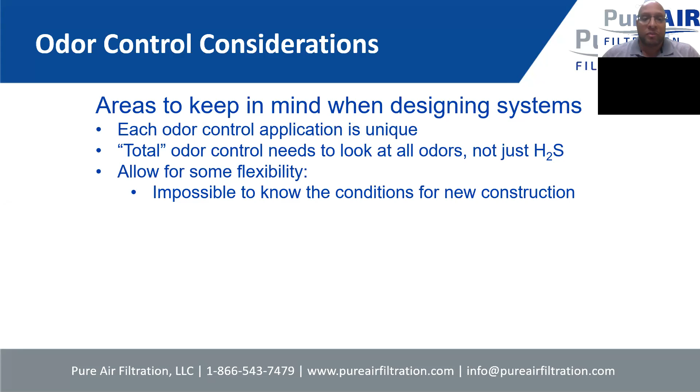Also, it's important to have some flexibility, because especially for new projects, you may not have all the information up front. Having that flexibility will allow us to customize that system, so that way we can make sure even in the future we have that flexibility to change up the unit if necessary.

So types of sewage odors - again, hydrogen sulfide is our primary focus today, and I would say the most common gas that is required to remove. But you also have the mercaptans, some reduced sulfur compounds such as dimethyl disulfide, dimethyl sulfide, and carbonyl sulfide, as well as ammonia, amines, and some VOCs. So it's important to know that process, and get a better feel for what other odors may be present.

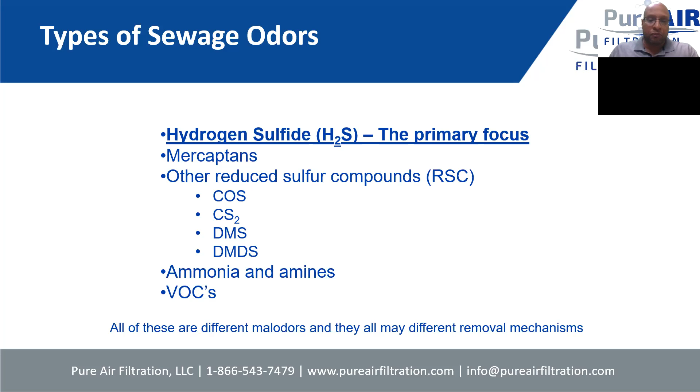Here's an odor threshold, odor detection chart to give you an idea of the different odors and what that smell correlates to. Hydrogen sulfide, rotten eggs, which most are common with. Mercaptans have more of a rotten vegetable, cabbage, or garlic smell. And some of the dimethyl sulfides and carbonyl sulfides have different odors as well.

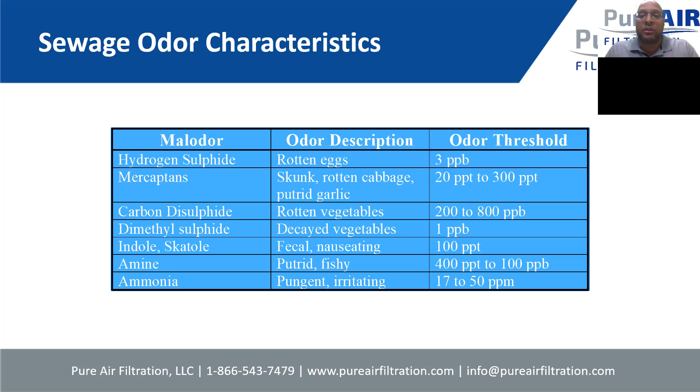It's important to know that the odor thresholds, for example for hydrogen sulfide, is very low, so at 3 ppb it's very easily detected. So even if your H2S levels are very low, you can still have customer complaints in the surrounding area. That's why it's important to have some type of system in place that gives you 99.5% H2S removal, or even 99.9%, so you really get it below that odor threshold.

So the technologies for the different H2S levels - this is important for us. It gives us the ability to design a system properly, looking at a few different variables, whether we want to make the system as cost effective as possible, but also make sure the unit's going to last, or the media has a long life, at least 1 year minimum. Because no customer would really be interested in changing out media frequently.

So on this slide, we talked about different odor levels. For example, if you have very low or intermittent H2S levels, standard adsorbents would work pretty well, as far as plain carbon, as long as you design that system with a few accessories I'll talk about later, to provide that necessary odor control. In some cases we can even use our side access housings for these systems, and they're very advantageous because you can reduce that footprint while still providing a system that gives you high efficiency.

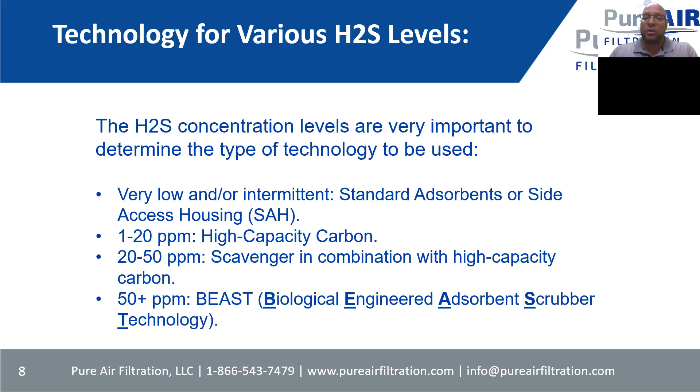So this is the odor control system selection chart. This chart was used in a previous webinar, but I thought it was very helpful as far as what systems you would use based on the airflow as well as the H2S levels. If you have very low airflow and very low H2S levels, in some cases you can use different engineered adsorbents, activated or plain activated carbons. As that airflow increases and the H2S levels increase, you're fixed into what type of system will be best to use.

I also wanted to mention that even at 50 ppm H2S levels, typically we would go with some type of biological system. Actually, in some cases, if the airflow is low enough, it may make sense to use an engineered adsorbent. So that's something we keep in mind as we're moving forward looking at the entire design to see what makes sense. Again, as I mentioned previously, all these system units are for the most part custom - each application has its own identity.

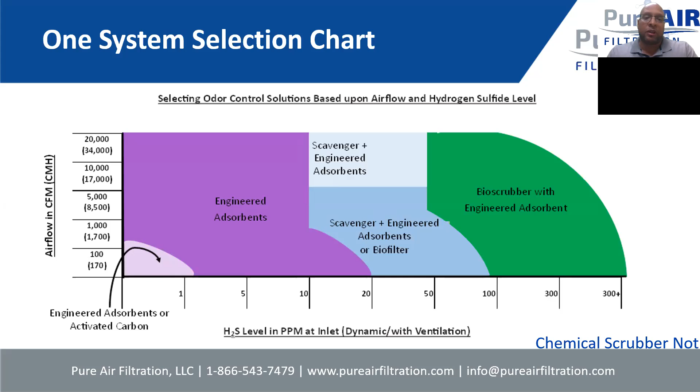So you look at all different solutions to a new project.

As I mentioned, for very low intermittent H2S levels, it may make sense to use a side access housing. The benefit of a side access housing—this particular unit shown here is painted steel—is that you can provide higher velocities through the media itself. I'll talk about velocities a little later, but that allows a smaller footprint for the system, which helps with cost as well as installation.

So it's only recommended for very low H2S levels. Otherwise, you'll be replacing the media quite frequently. But if the levels are low, it definitely is a great option.

These units are now manufactured out of fiberglass, so that gives it the highest corrosion resistance. We have a few systems installed in various locations out of fiberglass.

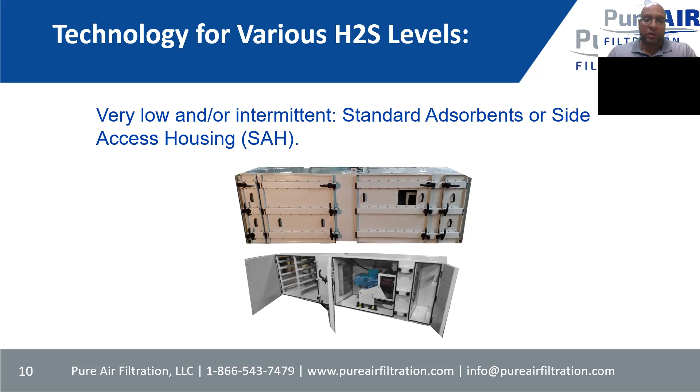Those side access systems are equipped with modules—basically plastic, disposable modules filled with different adsorbent medias to remove the different odorous gases. Typically for wastewater applications, we would use our PP12 module, which holds more of the adsorbent media.

We'll slide those modules into the system, turn the unit on, and it will connect up to the existing duct and neutralize the air. As I mentioned, it's a very effective system for lower H2S levels, and it really reduces the footprint to make the system more cost effective.

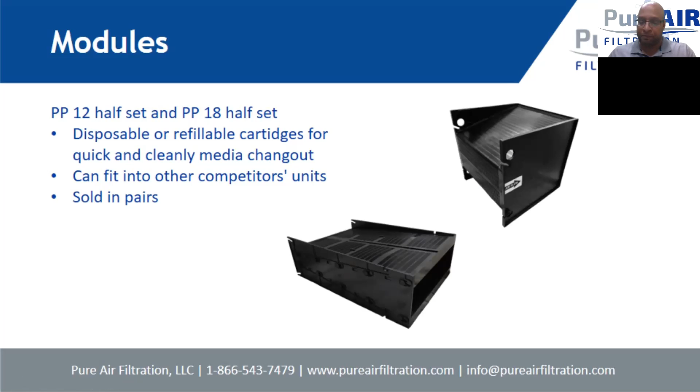For H2S levels in the 1 to 20 ppm range, you would use a high capacity carbon or engineered carbon—for example, our Sulfazorb XL media.

I didn't show a unit for this particular slide because that media, our Sulfazorb XL, can really fit into any one of our units. It really just depends on the airflow that's required, as well as the H2S levels, and from there we size the system. So that's the high capacity carbon we'd use for the 1 to 20 ppm range.

For 20 to 50 ppm, we would of course use our Sulfazorb XL as a high capacity carbon, but we would also use the scavenger I mentioned previously, our Sulfazorb FE. That acts as, I call it, a punching bag for the H2S—it takes the heavy blow, and then the Sulfazorb XL will polish the remaining H2S.

Again, this media can be loaded into any one of our systems—whether deep bed systems, or typically the deep bed media can be placed in side access housings, though in most cases that wouldn't be necessary.

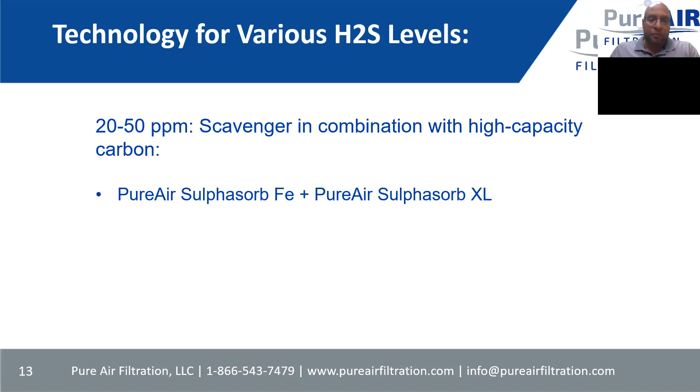And again, at 50 ppm or above, you're looking at biological technology, which won't be discussed in this webinar but will be covered in next month's webinar. But again, depending on the airflow, we may not rule out an engineered adsorbent system even with higher ppms—it's a case-by-case evaluation.

Types of adsorbents: activated carbon is just plain carbon, whether coconut shell, coal-based, or in some cases wood-based. It's good for general odor capture, especially VOCs. It's been around for quite a while and is very effective that way. It's not really designed for H2S, so it doesn't have much capacity for H2S removal, and there's also no way to measure the remaining life of the carbon itself.

Engineered adsorbents use chemisorption principles—whether it's an activated carbon impregnated with or combined with a catalyst. That lets you focus on particular gases with that media itself, and the media life can be measured by measuring the remaining amount of that catalyst. Scavengers are a low cost media, like a roughing media, for H2S.

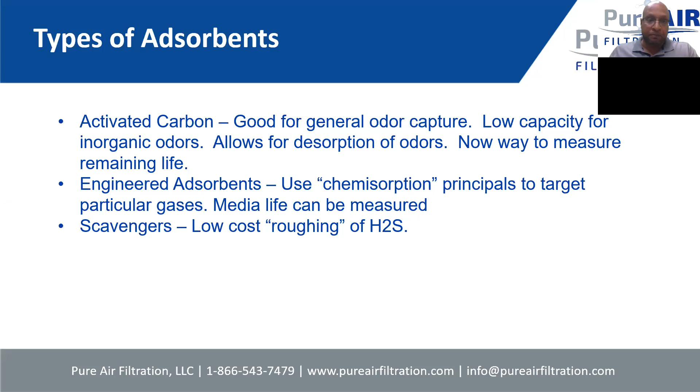So how does gas phase adsorption work? We've touched on this in previous webinars, so I won't dig too deep into it, but I'll explain a little: the different medias used for odor removal are very porous, and that's what captures the gaseous molecules and holds them in place.

For plain carbon, as those molecules come in, they're held in place by the media itself inside the media. Now the problem with plain carbon is that as larger molecules come through, they can dislodge the molecules already in there—this is called desorbing or off-gassing. So there's that potential for off-gassing in some plain carbons.

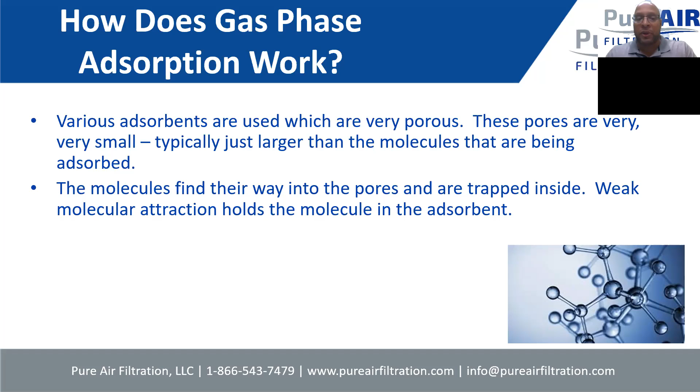With chemisorbent medias, since they have that catalyst inside, once those gases come in they react with the media and the catalyst, so it keeps them inside and there's no way for it to desorb. Once that media is used up, since that's a permanent reaction, you have to dispose of the media and replace it.

This slide touches on adsorption and chemisorption. I won't spend too much time here, as this has been covered in previous webinars, but the best analogy for the different medias would be to view them as a sponge. Just as a sponge soaks up water and holds it in place, adsorbent medias work similarly, where gases are essentially sucked into the media itself. Depending on whether you have some type of catalyst will determine whether it's chemisorption or adsorption, but it's still a form of adsorption.

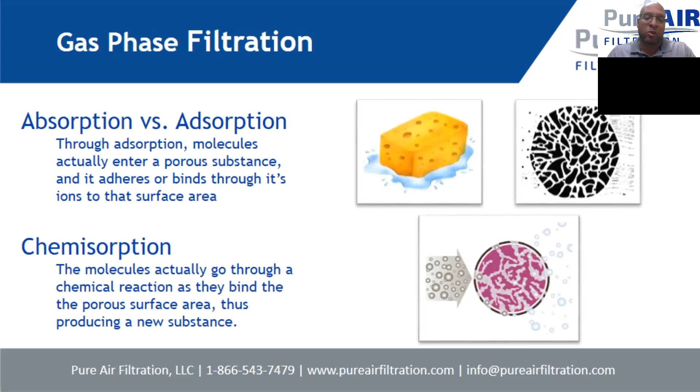Here's a microscopic view of activated carbon, just to show how porous it is. Those molecules are trapped inside of those pores.

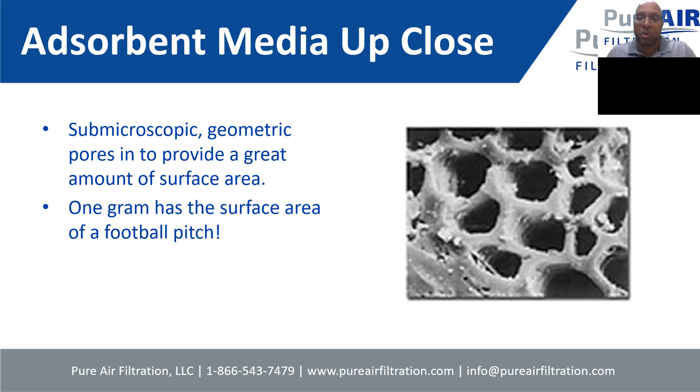So types of filtration media: you have a physical process, adsorption, as I mentioned, with activated carbon as an example, where it holds the media in place. That process is reversible. So if you've heard of regenerating carbon, whether via heat or water, in essence you're just washing out or burning out the gases that were trapped inside.

And then you can reuse that carbon. The chemical process, or chemisorption, examples are permanganate-based medias, or medias impregnated with a permanganate, also impregnated carbons. That process is irreversible. So once the gas reacts with that particular catalyst, it turns the entire media itself into a solid byproduct.

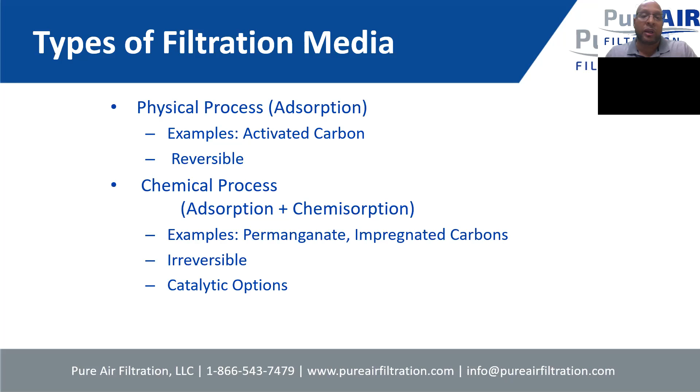So what is activated carbon? In essence, it's just charcoal that's been activated, typically with steam, to open up the pores, to ensure that the carbon will hold on to the different molecules. It's great for removing VOCs, but not a great capacity for H2S, and you can have off-gassing as I mentioned previously. There's really no reliable method to check and see when it's used up.

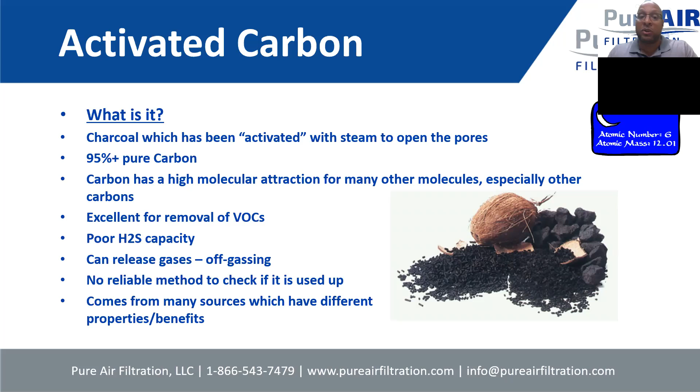In essence, it's more of—I wouldn't say it's a guessing game, but you're waiting for a breakthrough to determine when it's time to change the media, which is not ideal.

So carbon regeneration, as I mentioned previously, there are two different types of regeneration: whether you're using a kiln to burn away the different adsorbed gases, and then you take that regenerated or reactivated carbon and reuse it in the system. But each time the carbon is reactivated, you're losing that effectiveness, so over time you have no benefit from the carbon.

There's also water regeneration, in situ, where the entire vessel is filled up with water to rinse out the different gases, say for example H2S, and it washes that out and basically turns into sulfuric acid. The problem with water regeneration is that it doesn't wash out the other odors that are going to be present in this application.

So you're going to lose that effectiveness and efficiency for the media, and once you regenerate the system, you have to wait for the unit to dry before you can activate it. There's quite a bit of downtime when using water regeneration, and generally we're just seeing that technology phased out. The majority of engineers and consultants we work with aren't using this technology at all.

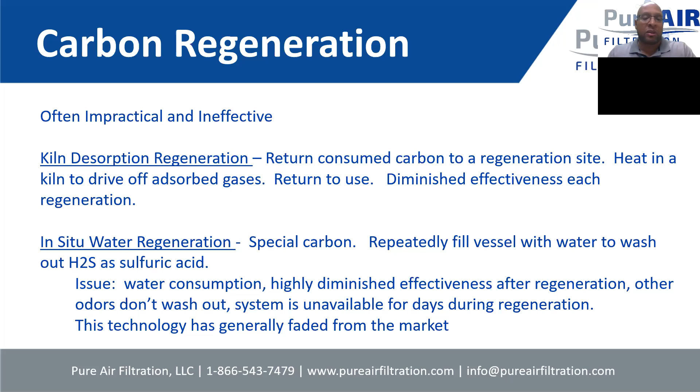So chemisorption, as I mentioned previously, is when you have a media impregnated with some type of catalyst, for example potassium permanganate, which will oxidize most odors. In essence, you're just converting that gas into some type of inert solid that can be landfill disposed, and it's non-toxic or non-hazardous.

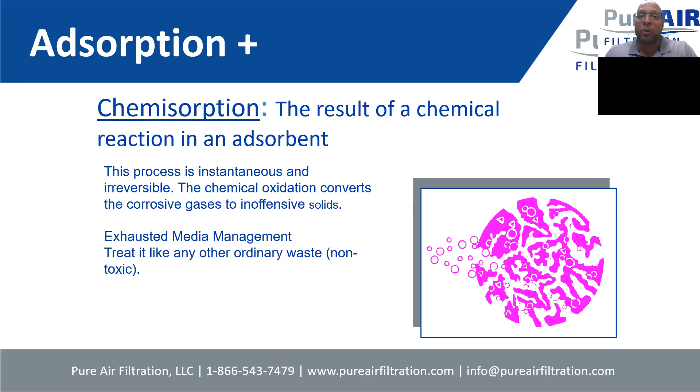So, different engineered adsorbent medias—really, depending on what gases are present will determine what media we use to ensure we get total odor removal. As I mentioned in this presentation, we are discussing H2S, so that'd be our Sulphasorb XL. But again, as it's very common, there are always other odors present.

So when the systems are designed, we ensure that we have the ability to provide some type of, as we call them, polishing medias, to ensure we're going to take out all the odors. I'll discuss a little bit later our thought process when designing these systems, to make sure we provide a unit that's going to take out H2S for the length of the desired media life by the end user, as well as ensure we take out those other odors.

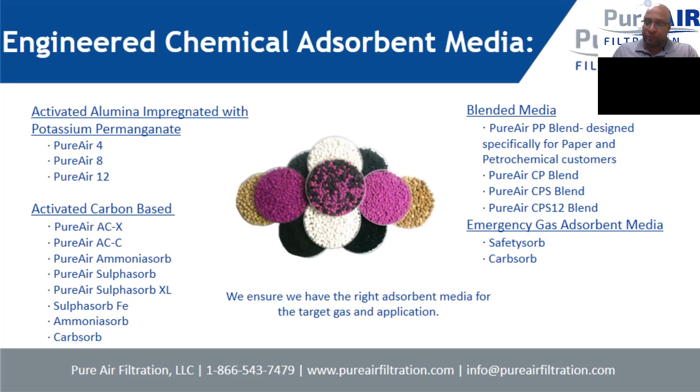Some of the substrates of the engineered adsorbents used, whether it's activated carbon, may be impregnated with some type of acid to remove different gases. Aluminas are very popular, as well as some zeolites and clays. The clays are more of the scavengers used as H2S roughing media. Some of the different impregnates include caustics, acids, oxidizers, and different catalysts.

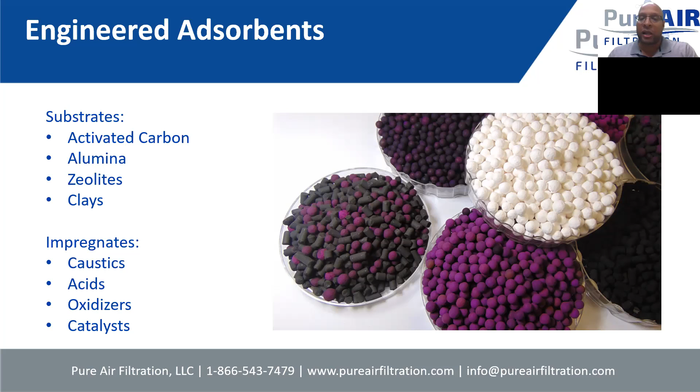This slide is really a representation of our Sulphasorb XL. It's a carbon-based media, but I'm going to say impregnated - they take a carbon powder and add a catalyst to it, which is typically magnesium oxide, I believe, and then extrude that into a pellet. So this media is really great for H2S removal.

It's in essence like an H2S sponge, looking to remove the different H2S. Depending on what substrate was used for the carbon, it may have some capacity for VOC removal, but typically it's designed for H2S. It has 66% by weight of H2S removal, so now we can really reduce the size of the system and still provide great efficiency.

As the H2S comes in, in essence there's a chemical reaction where it separates the water, and then you have a sulfur byproduct. This media is landfill friendly and can be disposed of - we just recommend you follow any local codes when disposing.

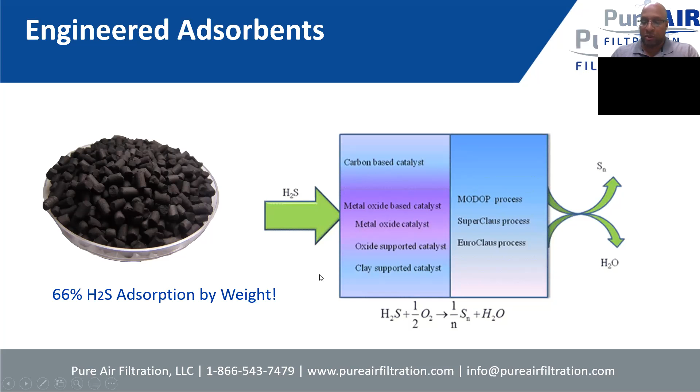Permanganate impregnated medias - again, that's typically activated alumina, a very porous substrate, impregnated with KMnO4. We can provide different concentration levels of the KMnO4 depending on the application, typically 8% or 12%, to give us that added odor removal.

How it works is that the permanganate is going to oxidize the different gases as they pass through the pellet. In that way, we neutralize a lot of the organic odors.

The media is non-combustible, so the alumina won't catch on fire or burn, which is very important, mainly in toxic scrubbers, where you're dealing with very high levels of a toxic gas and have that volatile reaction. So it's important to have some type of media that won't combust.

You also have an added benefit of a permanganate-based media in that it changes colors. As the media is being used up, it starts off a very bright purple, then goes to more of a brown color, and it's actually white when it's used up. That helps give the ability to know if the media is used up or not.

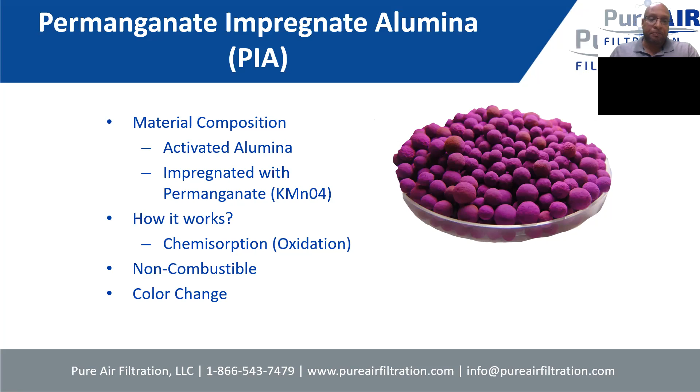This is a blended media that's our PureAir Filtration go-to polishing media, because we're blending a plain carbon and a permanganate-based media. So now we have nice broad spectrum odor removal, and we place that media as the last layer in any of our odor control systems.

That way we'll start off with the media to remove H2S, and then after we remove the H2S, we'll go into the second chamber with this polishing media to remove all the other odors. Just a little secret with PureAir Filtration - usually if we get requests, different projects will come up and we're given the airflow and H2S levels.

We'll always design a system to make sure we have the unit, the media will last a certain amount of time, whether it's a year or two years, but we're always going to design a unit to make sure we can accommodate a polishing media. That way we can remove those odors, or at least have that ability to provide this media in the future. I think that's very important to vividly remember.

There was a project where we worked on, they wanted to remove H2S and we designed a system for that, and it was no problem. But come to realize there was no H2S in the process - it was other odors, and they had a neighbor pretty close that was still complaining about odors. So in the engineer's and end user's mind, well, this system doesn't work. But actually the system was designed to remove H2S, and it would do that, but there were other gases. We were able to provide a different solution since the unit was designed to accommodate a polishing media, which worked out well.

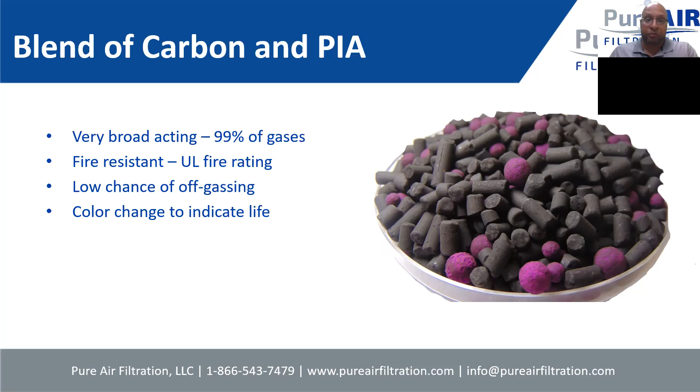In the Scavenger, again, it's our Sulphasorb Fe. It's basically a clay-based substrate with iron oxide, so it's going to be very efficient at removing high levels of H2S.

Again, as mentioned, more of a roughing filter, roughing media. So if you have high levels of H2S, we can knock that down to about 90% or so, and then from there, make it a little more manageable to remove the remaining amount using a high capacity carbon and also the polishing media.

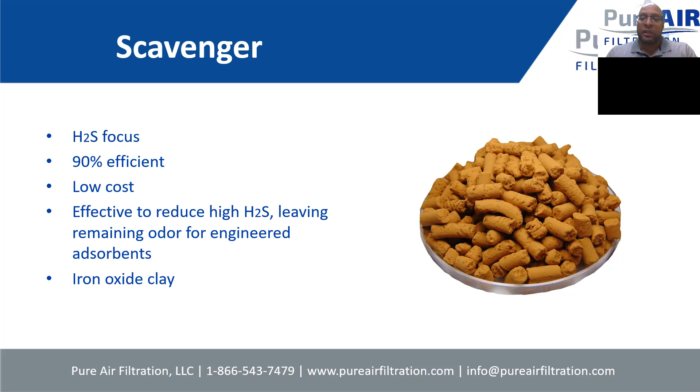The benefits of the Scavenger: even at very high levels, you may have to replace the media a little more frequently than a high capacity, but it's very low cost. So it takes the sting out of replacing that media because of the lower price point for this particular media.

So different materials in construction for odor control vessels and systems, with fiberglass being the most popular and most recommended, at least by us, as far as any wastewater application. It has the highest corrosion resistance, and you have a lot of flexibility as far as different configurations with different molds, and we can configure it and customize it to fit in most footprints and spaces.

High density polyethylene, in some cases very popular, starting to gain more traction as far as the material of construction. You have a little more improved cost than fiberglass, and also improved long-term UV protection. In some cases it may just be the consultant's preference whether they want fiberglass or the HDPE. Either material of construction is acceptable to PureAir, so we have that flexibility that way.

316 stainless steel is very common as far as the metal itself in wastewater applications. In regards to odor control systems, it's definitely effective, but it's very important to make sure that the system's designed properly. You need to have some type of mist filter on the inlet of the system itself, because you don't want wet, moisture-laden air combining with the hydrogen sulfide, creating sulfuric acid in the system. Over time, it could start to corrode even 316 stainless steel.

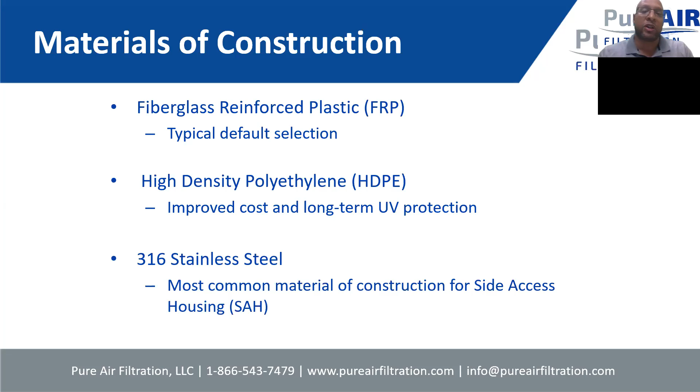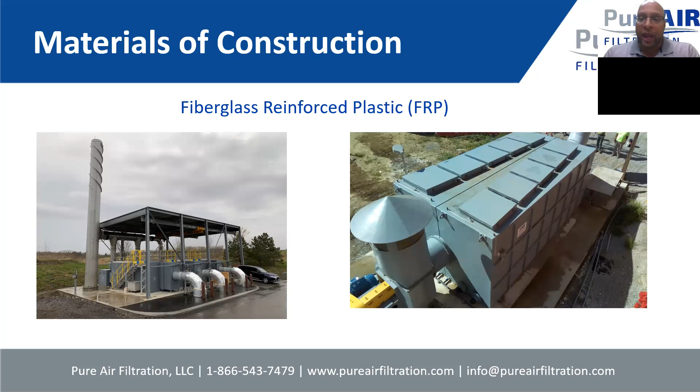So some different materials of construction again: fiberglass, shown here in these horizontal systems, gives you an idea of the flexibility of molding that fiberglass to fit in very tight spaces. So very popular in regards to lower profile systems, and you still have that excellent corrosion resistance.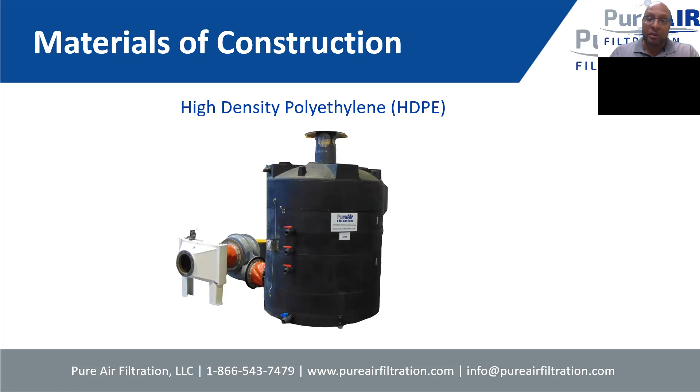And also 316 stainless steel - as I mentioned, for these configurations of systems, the horizontal ones I'll discuss a bit later, 316 stainless steel was very popular, as you can bring in different sheets of metal and then weld them together. Now, fiberglass will be the material of construction of choice in almost all applications, as our recommendation, but depending on the odor level, 316 stainless steel is an option.

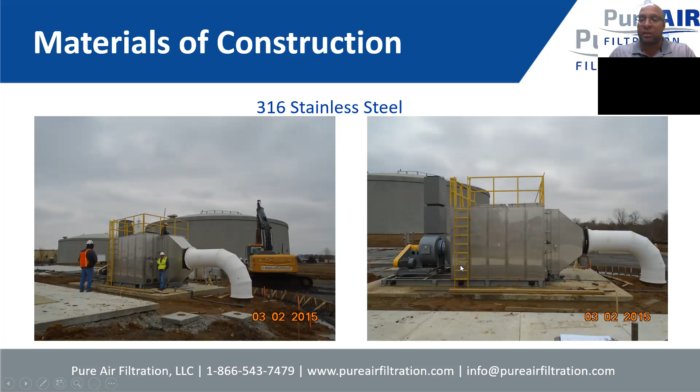All right, so different configurations: vertical flow versus horizontal flow, upflow versus downflow, and then blow through versus draw through. Vertical flow systems are very common, very popular, really for different applications - it really depends on the space. Any footprint or space restrictions will determine which configuration may work best for the consultants or end users.

Very simple construction for really all of the adsorbent systems. We have the inlet mist and grease filter, very important - we want to keep that adsorbent media dry, because you don't want any water molecules or droplets, or any grease, blocking up the pores, which will limit the effectiveness of the system. Then we have the blower and the vessel, then the adsorbent media.

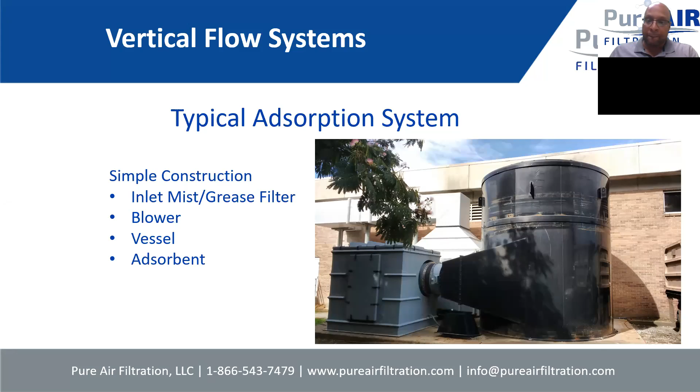Horizontal flow systems, really the same design. You have the blower, vessel, the media, mist and grease filters, but now all the components are in a more streamlined unit, connected as one complete assembly that can be dropped into place, ducted in, and then powered and run.

From our experience, our recommendation typically would be for horizontal flow systems. As I mentioned at the beginning of the webinar, with PureAir filtration, we ship systems all over the world, so it is much easier to ship the horizontal units, as they are designed to fit in ocean containers. It makes for a very compact, low profile system that can be used worldwide.

It also gives flexibility as far as the different media, with separate media chambers used to provide different adsorbent media depending on the different gases. As I mentioned, we design systems to remove, say, H2S, but we want to account for other odors that are more likely to be present. Having those independent chambers allows us that flexibility in the future.

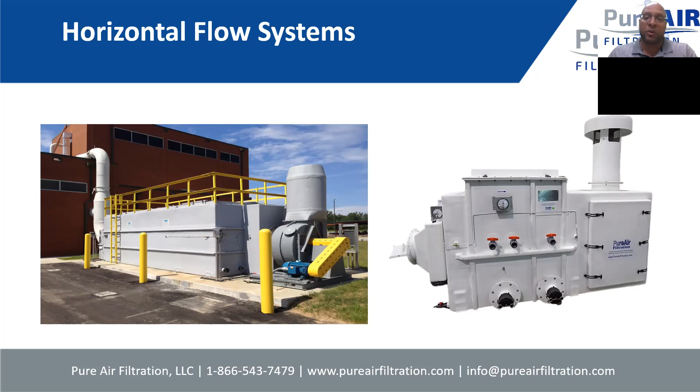So upflow versus downflow - this is really in reference to vertical systems. Typically, I would say 99% of the time, odor control units will be an upflow design. You have the blower itself blowing into the bottom of, say, using the drum as an example in the photo on the left side. As the odorous air comes in through the blower and blows into the bottom of the drum, that odorous air moves its way through the adsorbent media and is then discharged out through the stack. It's the most common design for odor control.

The downflow design is typically seen in toxic gas scrubbers. It allows you to remove only the portion of media that's used up - you can skim off the top of that media and replace only that. With an upflow design, it's very important to have a mist and grease filter, which ensures that no grease gets into the bottom of the unit and plugs up the perforated screen. As long as a mist and grease filter is in place, the upflow design for these vertical systems is probably the best design to go with.

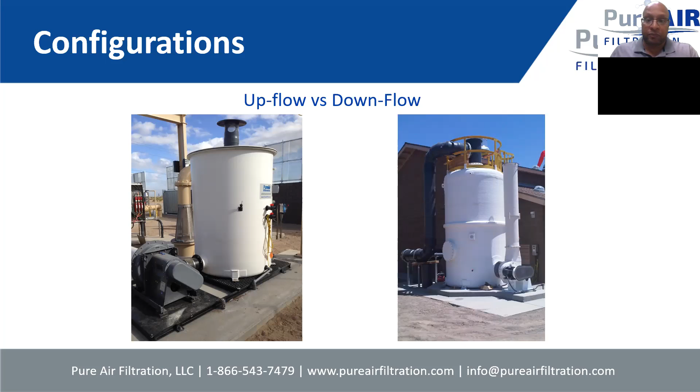Blow through versus draw through - again for vertical systems, I would say about 99% of vertical odor control systems will be blow through. You'll have the blower on the dirty air side with the mist and grease filter capturing it. In essence, you're bringing that air through the blower and blowing it into the vessel with the adsorbent media.

Typically, horizontal systems can also be designed blow through, but our preference is draw through design for a few reasons. One, we're ensuring that the blower is on the clean air side of the scrubber itself, which gives us flexibility on the different materials of construction for the blower - I'll talk about that shortly. It also allows, depending on the design of the system, when you have the unit or vessels under vacuum, the maintenance access doors with gaskets seal better under vacuum instead of being pressurized. So our preference is always draw through when working with any horizontal system, but we could do blow through - for those reasons though, we'd go with draw through.

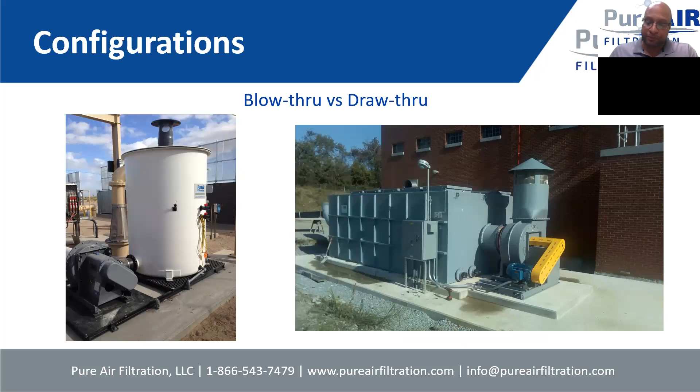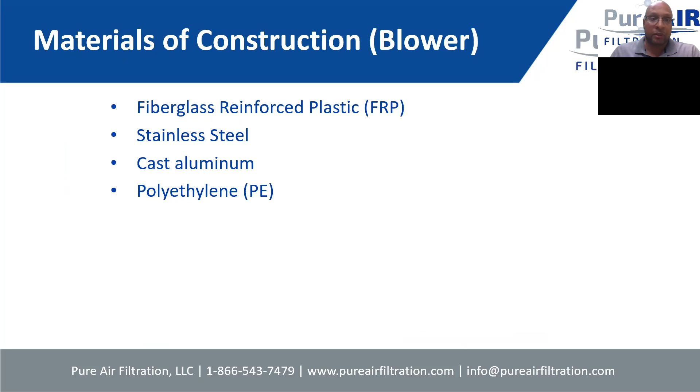As I mentioned, materials of construction for the blower: we've got fiberglass reinforced plastic, which is most common, stainless steel, cast aluminum, and polyethylene. Fiberglass reinforced plastic - I don't need to spend a lot of time on this, as it's the most common. You're going to have the highest corrosion resistance and strength when designing the systems, handling very high airflows and high pressures. Very tried and true blower material for really all wastewater applications.

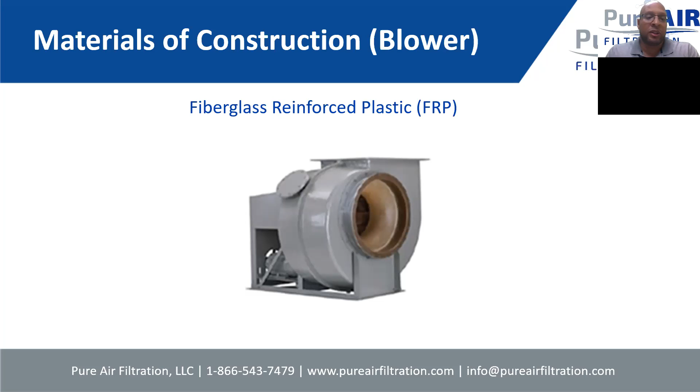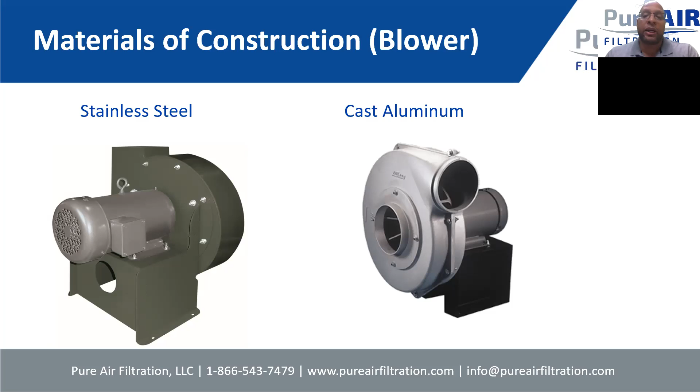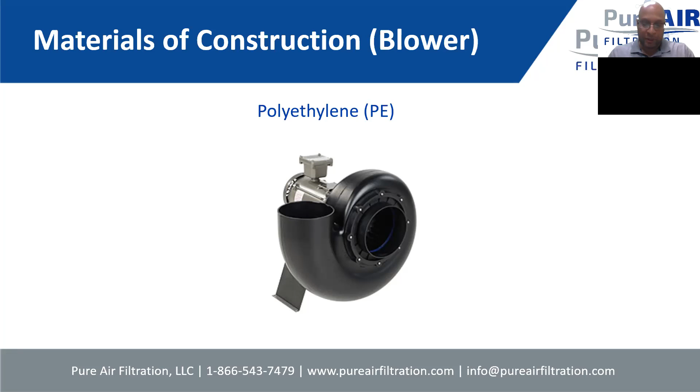So, some of the items that we take a look at.

Some of the accessories, as I mentioned previously, mist and grease eliminators or pre-filters are very important for odor control systems, because you want to remove any moisture or water droplets in the airstream before it gets to the adsorbent media, so you don't hamper the media's performance. These systems are designed at a particular velocity to ensure proper mist and grease elimination, with proper impingement to make sure the filter will hold that grease or mist. These filters are washable and reusable—once saturated, they can be removed, cleaned, and replaced. In most cases customers will have a spare to swap in as they clean one, alternating back and forth.

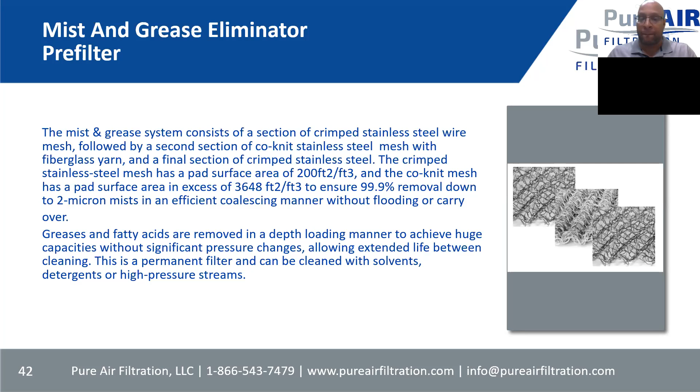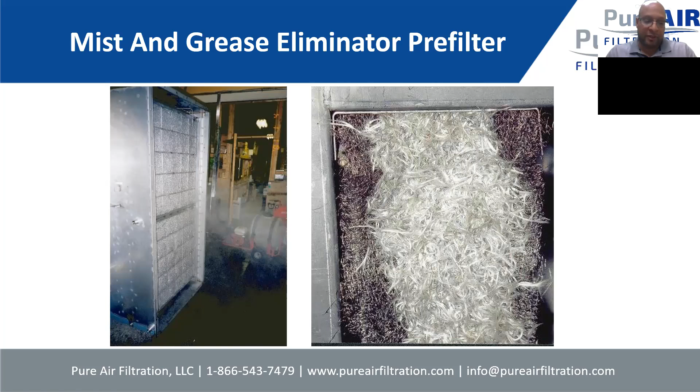Here's a close-up showing what that filter actually looks like—you have a 316 mesh followed by fiberglass, then finished off with more 316 mesh. The reason it's designed that way, which I found out about a year ago, is to ensure that end users or maintenance won't install the filter the wrong way. You can install it either way and it's going to work and perform as intended. It's a nice foolproof way to ensure the system is working properly.

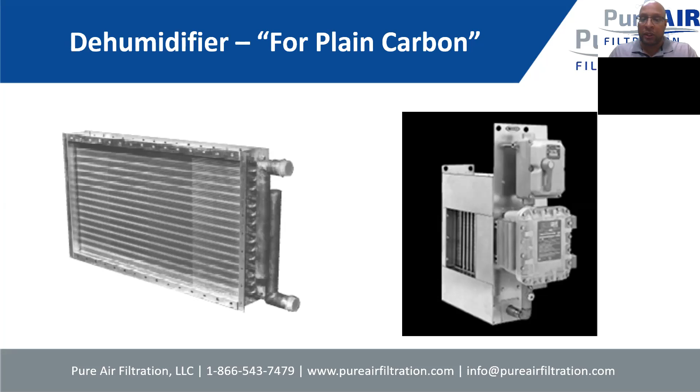Dehumidifiers—wanted to touch on this briefly, mainly for plain carbons, because the engineered adsorbent medias are hydrophilic, meaning they actually work well in humid environments; for that catalyst, it helps the process of removing different gases. With plain carbons, you don't want that—you try to avoid having water molecules present, because it will lower the efficiency of the carbon itself. So in some applications you may need a dehumidifier, whether it's a duct heater or some type of chill coil, to reduce humidity before it goes into the adsorbent media section. This can be very expensive, since these systems are on the inlet of the units, quite possibly in the explosive or hazardous envelope, requiring an explosion-proof duct heater and controls. This expense can be avoided just by using a simple mist and grease filter as described above, along with some engineered adsorbents.

So in some cases, to speed up or help that process along, you can use H2S sensors on the inlet and outlet of a unit itself.

So different products for that. We've found some great success using Acrulogs, because they read to the lower levels, the ppb range, pretty effectively. It also allows the ability to monitor the levels remotely, so you have an idea of what H2S levels are coming into the system and what's going out.

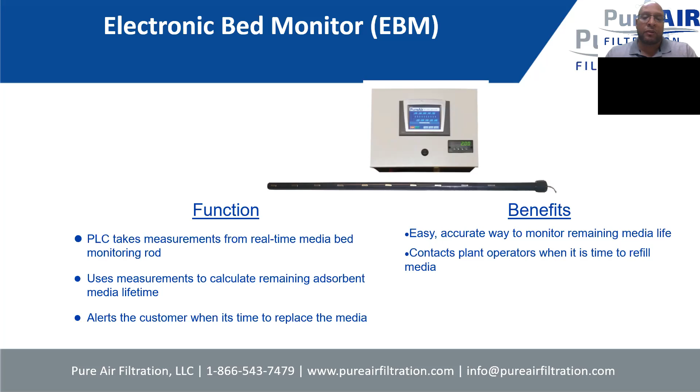System velocities are very important when we're designing systems. Usually if I receive an email or call from an agent or rep saying, hey, we have this application where we have, say, 1,000 CFM and 5 ppm of H2S, or whatever the H2S level will be, typically I'll design the system, if I can, in the budgetary capacity, at 50 feet per minute. I want to ensure I get the maximum H2S removal throughout the system. As I mentioned, we are concentrating on H2S for this webinar, even though I'll still ensure there's a system in place to take out other odors, but I'm going to size it based on the H2S concentration.

Especially for higher H2S concentrations, I'm going to design at 50 feet per minute. The unit will be a little larger, but if the space is there, it would be, I'd say, the safest, most conservative option. In some cases I'll go up to 75 feet per minute for lower H2S concentrations. Again, we look at it case by case as far as what the H2S level is, and how long you want the media to last before change out—considering those different scenarios when determining velocities.

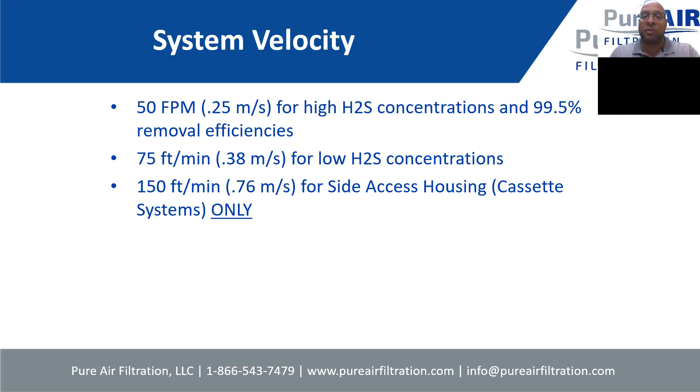All right, so empty bed residence time. In essence, effective odor control is just making sure we have that proper contact between the gas and the chemical media itself. So what I just showed here, we have a calculation that we use when determining residence time, typically for odor control applications.

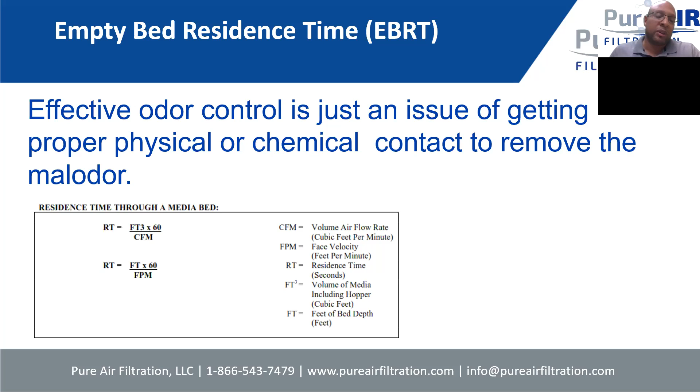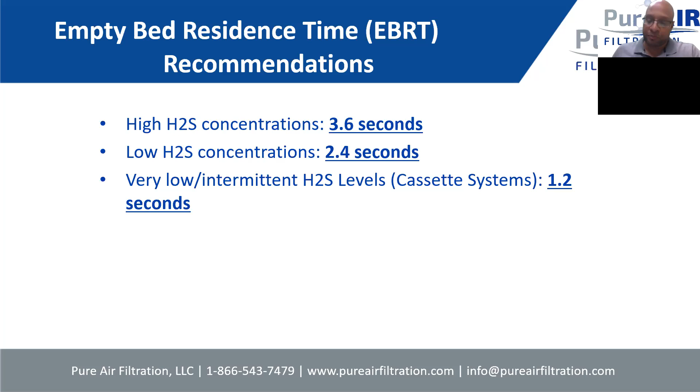Typically, the media bed is going to be 3 feet. So from there, based on the velocity, we'll determine our recommendations for empty bed residence time. So high H2S concentrations, 3.6 seconds; low H2S, 2.4 seconds; and very low intermittent H2S levels, cassette systems, 1.2 seconds. That's based on the H2S with the velocities I discussed previously, using that calculation.

All right, the media life calculation, which is important. I wanted to show this calculation, which is what we use if we know the airflow and the particular gas, in this case H2S, and the H2S level. So we use this formula to determine the actual media life, and this is based on the unit operating 24 hours a day, 365 days per year, continuous operation.

So we will determine the pounds of H2S, and then with that information, we can determine how many pounds of SulfaSorb XL would be needed to last at least 1 year.

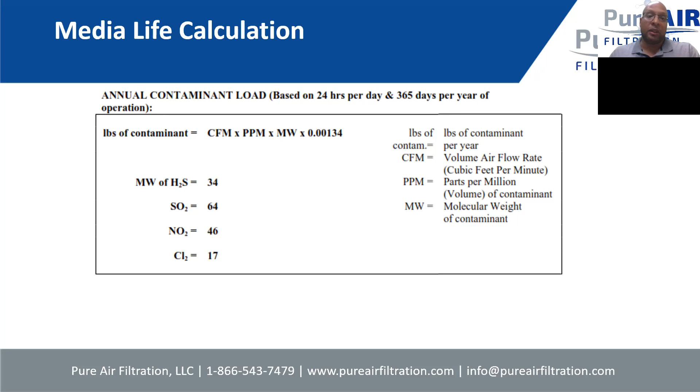So I did an example calculation. If we had an airflow of 1,000 CFM, H2S concentration level of 20 ppm, using that formula, we would see about 911 pounds or 413 kilograms of H2S per year. We know SulfaSorb XL has a 66% removal capacity by weight of H2S, so in essence you would need about 1,400 pounds of SulfaSorb XL to last 1 year.

If you want to get an idea of the volume required, you just take that pound figure divided by the density of the media itself, so that way you get an idea. All of our systems are sized via volume, so we can determine what size system will be required to ensure we get the maximum amount of life for H2S, but then we'll also provide a system with a polishing media to remove the remaining odors. That's very important for us, that we're always going to size a system to make sure we're removing all of the odors, but with H2S being the primary focus.